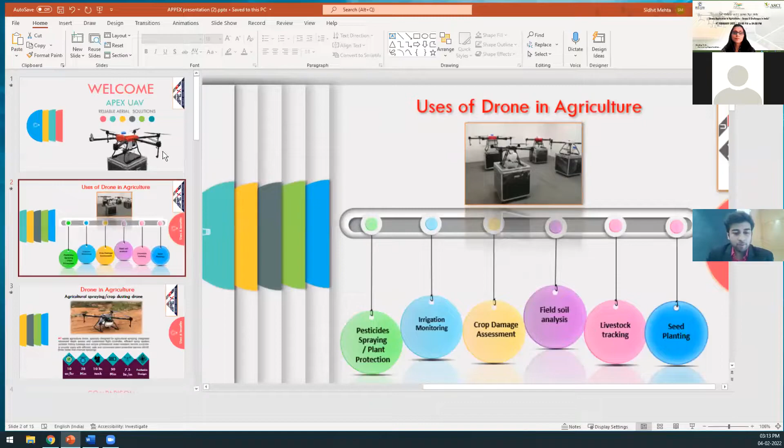Very small presentation. Thank you for the lovely introduction, Dr. Vandana. And yes, I do support Make in India, not just to make in India, but to make something cheaper or of better quality. That is the motto. With that clear, we shall start.

So, uses of drones in agriculture - I was hoping the doctor from TNAU would cover this so I don't have to, but I'll just briefly go over it again. Pesticide spraying in plant protection is the biggest use of drones as of now. It's established, not something new that we haven't seen. It has been well established outside of India since 2013.

Irrigation monitoring is also a part of similar drone use. We use an RGB camera and can easily map out that the water being used to irrigate the field is evenly laid out - it's not getting clogged or logged at point A or point B, and all the crops and roots receive an equal amount of water.

Crop damage assessment and field soil analysis is done by a fleet of multispectral drones. These drones analyze and receive the electromagnetic wavelengths reflected from the leaf and soil of a particular area. Every chemical or element has a different reflective index, so by analyzing them we can get the exact chemical breakdown for each individual chemical - maybe certain fields have more potassium and others more nitrogen. So with field soil analysis using multispectral drones, we know exactly what crop to plant. We can minimize fertilizers and have better soil growth without tarnishing the soil.

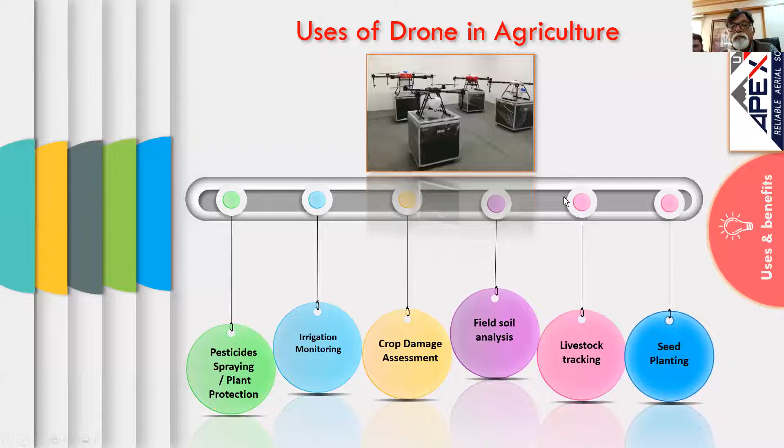Livestock tracking is starting to be seen more in hilly areas using drones. You must have seen in movies outside India, like Canada and Australia, where cattle have a green tag on their ear and a drone communicates with that tag. It's a batteryless tag with no electronics, it just reflects an RF frequency. By tracking that, the drone will know up to 100 meters where the cattle is, its exact location, temperature, and whether it's in distress.

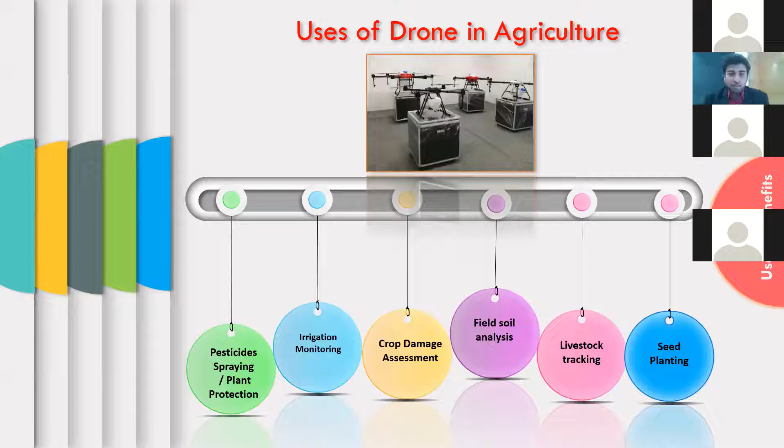Seed plantation is similar to spraying, where a drone flies with seed and sprays it across a field. This is mostly done in hilly areas, because on flat land most people prefer to plant seed manually.

Talking about industry standards, the way the industry is moving toward optimal solutions, a 10-liter drone is the most optimal. It can cover approximately 10 acres per hour, with a flight time of 28 minutes at full load, and the 10-liter capacity batteries can be recharged within 30 minutes. These are high capacity Korean batteries, which is why they support such fast charging, so we don't need to carry 10 or 20 different sets. With just 3 sets, we can have a continuous operational process.

7.5 liters per minute spray rate is also adjustable, but this is the maximum the drone is capable of. Generally, when spraying the field, we don't exceed 5.5 liters per minute.

Suitable design is... might mute the audio.

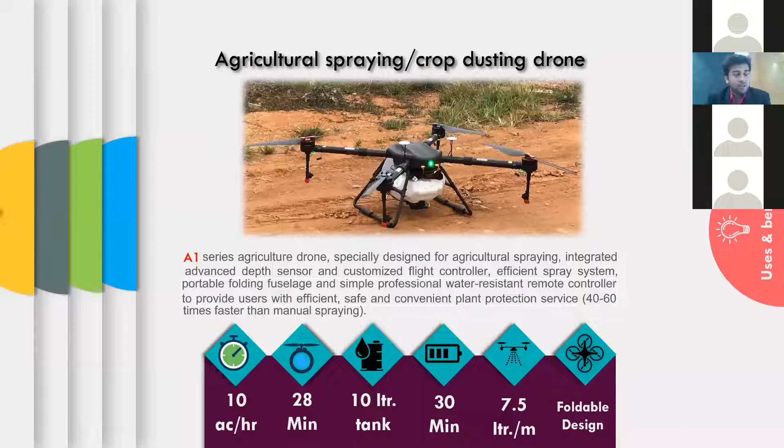The last point is foldable design, so that it doesn't get damaged during transportation or storage.

Taking a look at the comparison between traditional or conventional spraying versus precision spraying and farming: canopy coverage. With a drone, when the propeller is spinning, we have forced induction air going across the crop. Not only does it blow the dust off the canopy, but the spray also gets deeper canopy penetration compared to just spraying blindly with a tractor, which simply throws water mixed with medicine on the crop.

Dose management is something we can fine tune and control with a drone rather than blindly spraying with a tractor. We can set in the app exactly how much medicine we want per plant or per acre of the crop. Water saving with drones is significant too—we generally use 10 liters of water per acre, whereas in traditional ways we need anywhere from 200 to 500 liters, requiring us to dilute the medicine with much more water.

Treatment time is again very important. A manual sprayer needs about 6 or more hours to cover 1 acre properly, and a tractor can cover 1 to 2 acres per hour. A drone can cover much faster, flying at 45 kilometers per hour, covering a width of 3 meters, and can easily cover 1 acre in 3.5 minutes.

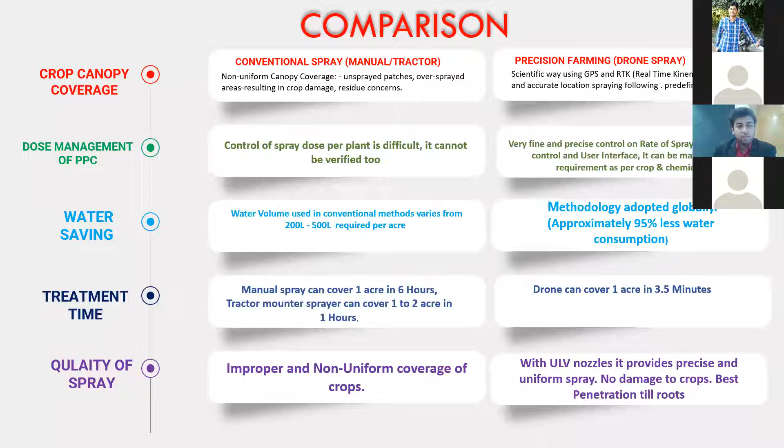Chemical utilization is also less, as less chemical is wasted in the air compared to spraying manually.

Safety is a big factor for me, because when I initially saw how spraying was being done here, a human would attach a backpack, generally 30 or 25 liters of basically poison mixed with water, on their back and spray for 6 hours a day, which causes a lot of health problems down the line. Not immediate death, but certainly the quality of life goes down. If someone sprays 6 hours a day, every day, they can develop lung problems like lung cancer or skin cancer within 5 years. Use of an aerial sprayer eliminates all of that.

Adaptability is again concerned with the type and the area of the field. It's difficult for farmers to work in wet farms like paddy, in step farmland, hilly areas and mountains. A drone with a terrain radar sensor and an obstacle avoidance sensor can easily cover all of that within the same time, maybe half a minute more or less.

Dependency on labor: when you see our farm is infested, you have very few days, probably less than 6 days, to go out and get labor, arrange people, arrange everything, and have them spray. With the use of aerial sprayers and drones, this is eliminated as it's a one-man operation, and more land can be covered quickly than any other way.

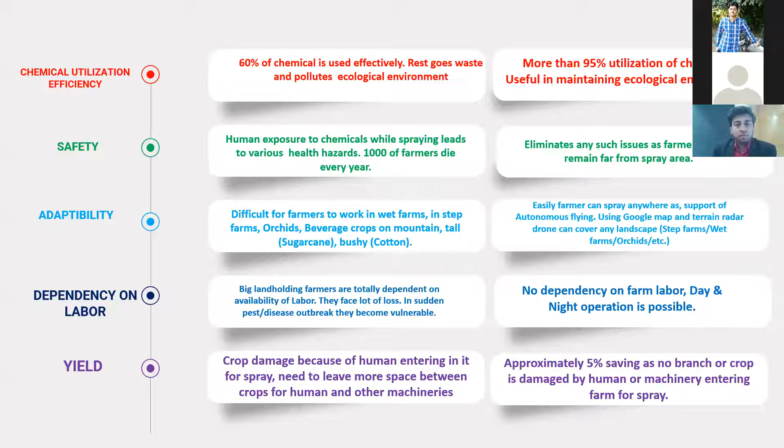Moving on to manufacturing and production, it may seem intimidating using or making or maintaining a drone at first sight, but it is not. Through the years, it has become really simple, and with a constant change in and advancement in technology, this will only get easier.

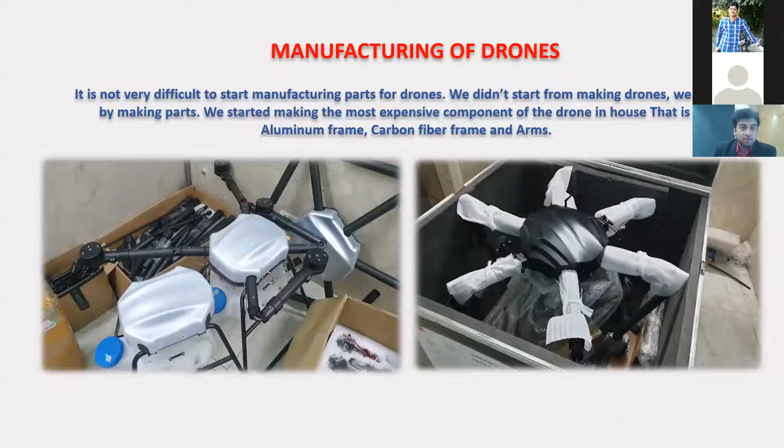How we started: by making parts, not drones. So we make the landing, we make the carbon fiber sheet. This is a vacuum mold in-house, so we have our own design. Then again, we use a lightweight, high-quality aluminum to make landing gear, landing strut, instead of using hydraulics and complicated parts.

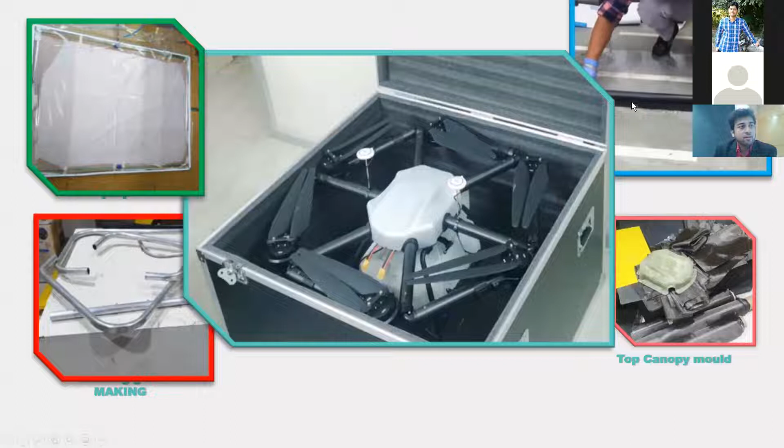The arm, the hands and the arms are made by rolling carbon fiber dipped in a proprietary resin over a titanium rod. Again, this is our canopy mold, our canopy design NCF. This is the most common one we will see.

Pilot salary, let's say helper also we could include, which is not needed, but this is a worst case example. Pilot license - yes, I know the good people at the Agriculture Skill Ministry are working to provide free licenses, at least for agriculture drones, to train people. But currently, the license costs 65,000 INR, and a few days ago DGCA announced 12 more drone institutes across India who are authorized to give licenses for operating drones up to 150 kilos.

We'll account for petrol as well, just in case, given a budget of 10,000 for petrol. Maintenance would be around 5% of the total cost. Insurance is currently less than that, but we have taken per year, it's 40,000. In total, it would come to just shy of 19 lakhs.

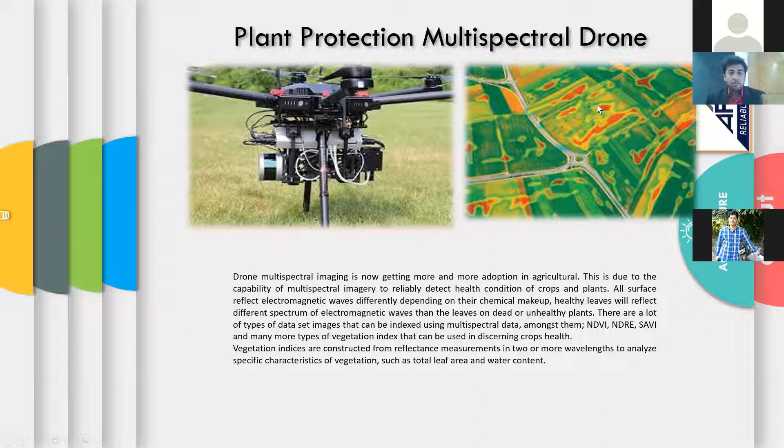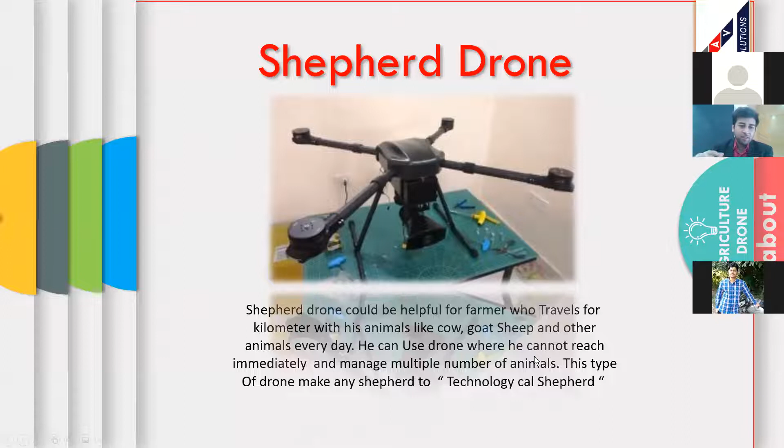There is a new type of drone also, which is not being used as much currently because the technology is not matured enough. These are called shepherd drones. I want to mention it because in a couple of years we may see these also in the market. Shepherd drones are used to herd sheep and cattle from farm to farm or for grazing. So if you have more cattle, like 4,000 or 5,000 animals, and you want them to move from a certain area to a certain area, these type of drones have a high-pitched ultrasonic sensor emitter, which emits a very high-pitched noise, inaudible by humans but very tedious to animals. It won't hurt them, but it annoys them, so they move in the opposite direction. Using this, we can guide and shepherd goats, sheep, cattle, cows, any kind of farm animal. Even chickens will respond to this, so they can be kept in an area and easily managed by one person.

So now all is well and good till now, so we must have some challenges. The first challenge is uniform distribution and spraying, that is its effective application.

Now we need the pesticide board to sign off on this. As of now, they have signed off on all organic use in the field by drone, but they are still collecting data and doing a good job at that. We would need to wait about 6 to 8 months more so that the pesticide boards can sign off on the use of chemical fertilizers with drones in a particular field, given the crop quality, the soil, the landscape, etc.

Instability in government politics and policies regarding drones is another issue. We get a lot of calls here, and farmers ask that now the government has made the drone legal and they can use it, but previously it was banned. How do we know that in future it won't be banned again? What if it's banned? If I invest so much, 6.5 lakhs in a drone, how would I know that my investment is safe? I'm not talking about what the government policy should be, that I leave to the respected officers in charge of such things. But my request is that once it is finalized, it should be fixed. It shouldn't be changed every 1 to 2 years, as that would just leave a loss of confidence among people.

Technical knowledge of farmers needs to be improved. I know many KVK centers and universities are working day and night, including some private companies also, to inform the farmer. The biggest challenge we have is that most farmers refuse to believe that if I spray 10 liters instead of 200, I won't get infestation. So we need to acknowledge that and teach the farmers that 200 liters is not the solution. The future moving forward is 10 liters or less per acre.

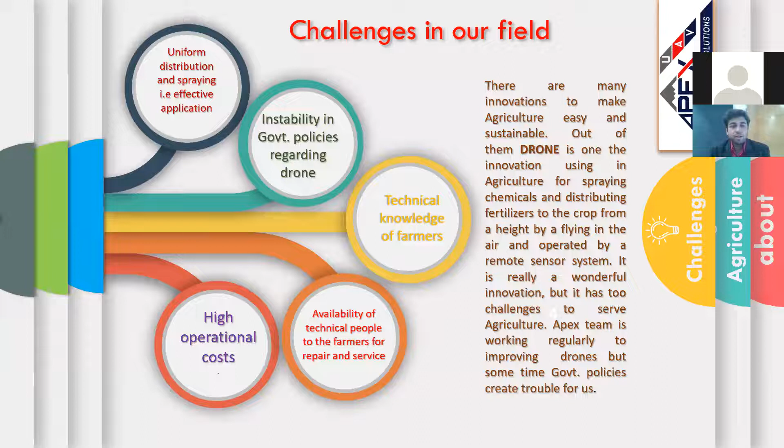Coming to government support, as I mentioned, the problem was in policies, but as we have seen now, we are in touch with DGCA and DGFT, and they are creating guidelines which will be here for at least the coming 10 years. Hopefully that would increase investor and farmer confidence.

The Pesticide Board is currently working already since last 2 years. I know, including TNAU University, that they are working on testing different medicine from different companies on different fields, matching with their climate, matching the soil quality and the previous nutrients used in that particular soil.

Subsidy - there have been recently talks of subsidy up to 50% on drones, specifically on agriculture drones. So I believe in a couple of months we'll have a clear understanding of how much the government is willing to subsidize this technology. And the last is, this is something we need to change - the farmer understanding and use of the drone and their mindset.

A lot of universities, and KVK, Krishi Vigyan Kendra, are working on this, and with time this will also be improved. Yes, that's all. Thank you.

Thank you, Mr. Siddhi, for the wonderful presentation. So clearly you have indicated not only how the drone could be manufactured - it's not such a difficult thing - but specifically, because it is always a pain point for everyone, whether he wants to get employed or wants to become an entrepreneur, he wants to see the cost factor of that particular thing and the commercialization, which you have covered very well. And definitely what you have said, that we need to motivate and convince our farming community to adopt this technology in a cost-effective manner. So thank you very much for these points.

Thank you, ma'am. So sorry for the inconvenience caused. So I will continue my presentation. Is it visible? Yes, it is visible. Okay. Are the slides moving? Yes, they are moving. Yes, sir.

As I have already explained, the Tamil Nadu Agriculture University is working on different geospatial technologies for soil monitoring, disaster and land degradation mapping. Now we have expertise in crop area mapping and yield estimation, and Tamil Nadu is the first state to introduce remote sensing based crop insurance as an operational service. With this technology, every year we are helping a minimum of 5 lakh farmers.

Now we are putting geospatial technologies into water resource monitoring. For the past 5 years we have been working on drones. Drones can be used for mapping and for smart delivery of agriculture inputs. So I will restrict my presentation to drone applications, with our own experience in different applications.

There are different types of drones - one for mapping, another for application of inputs. For mapping, we can have two types of drones: one is the quadcopter, that is helicopter type, and another one is fixed wing.

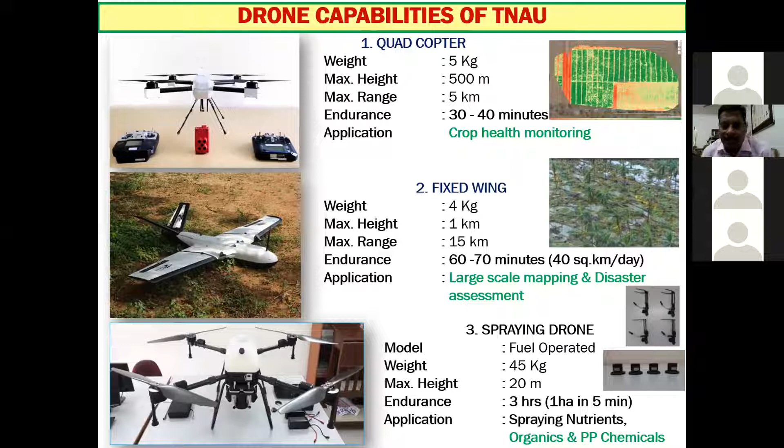The third one is the spraying drone. There are two types, fuel operated and battery operated. The fuel operated is the advanced one, with a takeoff weight of 45 kg. This type of drone can fly up to 20-meter height, with an endurance of 3 hours. We mainly use it for spraying nutrients, organics, and plant protection chemicals.

As you all know, we have different types of sensors for mapping, such as multispectral and hyperspectral sensors. Multispectral sensors are widely used with drones, having 3 to 6 bands, and the vegetation indices derived from them are widely used for assessing stress, whether pest, disease, or nutrient stress, and where to apply nutrients. This variable rate applicator can be linked to these images.

There are different companies working on providing multispectral sensors. The major ones are Parrot, MicaSense, and Sentera.

Hyperspectral sensors have the potential to assess different monitoring capacities, mainly different types of pest and disease very sharply. TNAU is working on identifying effective wavebands to discriminate or map the influence of pest or disease, whether the symptoms are visible or not. Many hyperspectral sensors are available, like Corning, then Headwall, now taking off quite well, and Mjolnir.

These are different hyperspectral sensors. Already the field ASD Spectra, ASD Field Spec Pro, is available at the field level. Many hyperspectral sensors are coming up for use with drones, which can be used for mapping crop stress or crop fields, discriminating crops, identifying stress, and effective application of inputs.

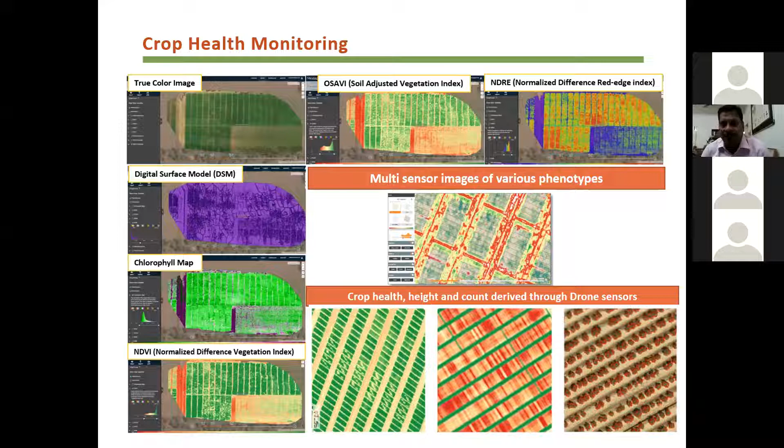A lot of applications are going on in selecting phenotypes. We can also assess crop health, height, and plant count, everything through drone sensors. For assessing crop health, we have come out with many vegetation indices, which can be effectively used for crop monitoring as well as stress detection.

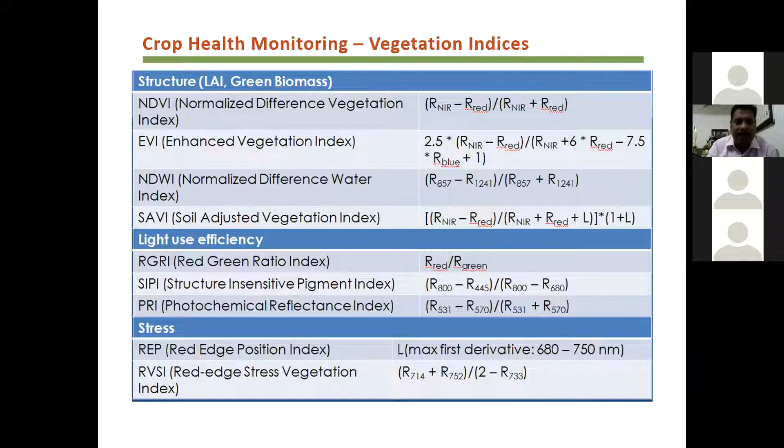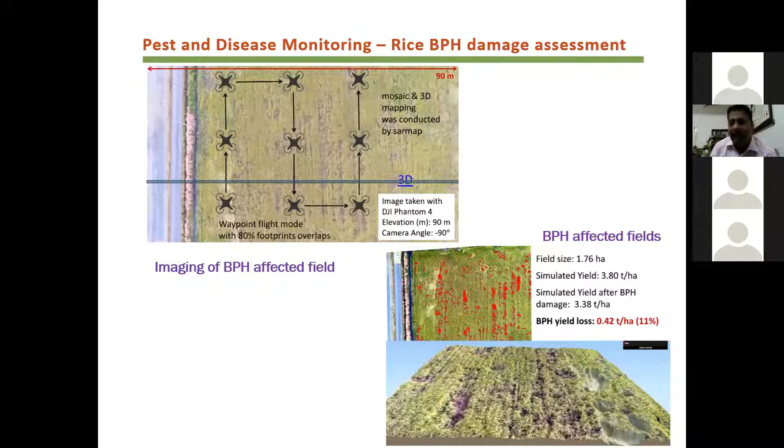One case is pest and disease monitoring - rice BPH damage assessment, where the physical damage can easily be estimated with 3D geo information from drones. In this case, BPH yield loss was assessed to be 11%, and we can exactly mark the area. We can go for precise application, through which we can reduce the quantity of pesticide dumped, as well as avoid environmental hazards through pesticides.

These are the different types: fixed wing, quadcopter. Fixed wing drones are highly useful in large area mapping, and we can operate it by hand throw. For image capturing, we go for more than 70% overlapping, which is very useful for 3D mapping. The second one is the spraying drone.

This is a fuel operated one, and it can cover 1 acre of area in 2 to 5 minutes, depending upon the spray volume. For example, nutrients need more spray volume, whereas low dose, high efficient pesticides and fungicides need only lesser quantities. We are conducting research on standardizing these things.

Here you see the herbicide applied plot - this is a non-selective herbicide. You can see the uniformity, which can be greatly achieved through drones, with more than 95% accuracy achieved with the help of uniformity in spraying. Here we have used an atomizer nozzle with a droplet size of less than 130 microns.

So one application is controlling weeds by using drones for spraying herbicide. Another one is fall armyworm, an invasive pest which has caused a lot of damage to maize. We have standardized and come out with a drone spraying protocol especially for this, and we have demonstrated it at farmers' fields also.

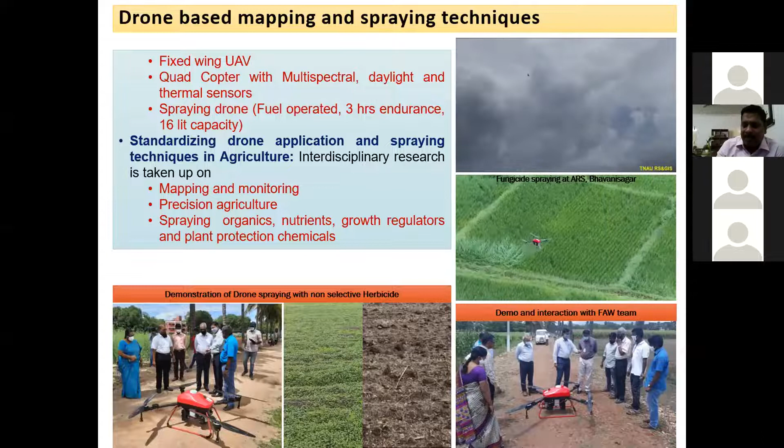When going for this type of standardizing spraying, you should come out with different features - that is spray dynamics as well as spray volume. One is spray fluid: with fuel operated drones we can restrict it to up to 30 liters per acre, that is 75 liters per hectare. We have also standardized the speed.

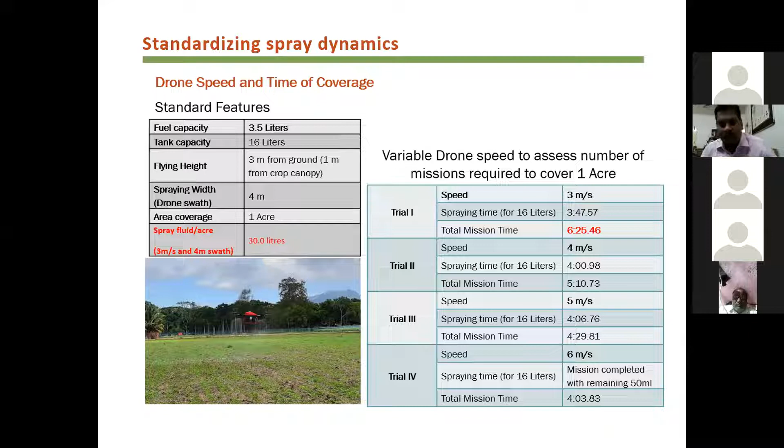The delivery also we have standardized. Within 1 or 2 months, we will be coming out with standard operating protocols for spraying these things. We have also studied the spray dynamics and droplet size, and found that in case of the atomizer, more than 80% of the droplets are within 70 microns, which is advantageous as we can achieve more efficiency and uniformity.

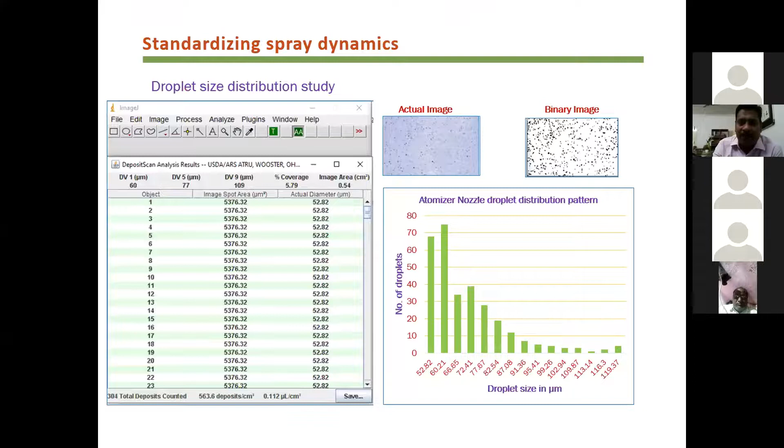These are different applications - one is fall armyworm control with emamectin benzoate. We have standardized 80 grams per acre with 30 liters of spray fluid to control the fall armyworm, with a second round of spray to take care of the insect. We have not only standardized individual sprays of pesticide and fungicide, we have now come out with a comprehensive protocol.

For example, rice has 4 sprays: one is pre-emergence application of herbicide on the 3rd day after planting, then pesticide spray to take care of sucking pests at 25 days, then to take care of leaf folders and stem borer at 45 to 50 days, then the 4th one, nutrient spray, and fungicide in case grain discoloration is anticipated.

So this is how TNAU is coming out with a comprehensive spraying protocol for each and every crop. Rice has 4 sprays. Rice, maize, groundnut, sugarcane, and cotton are the 5 crops we took in the first step, and now we are moving to horticulture crops also. For tomato, we have targeted fungicide spraying as well as Panchagavya.

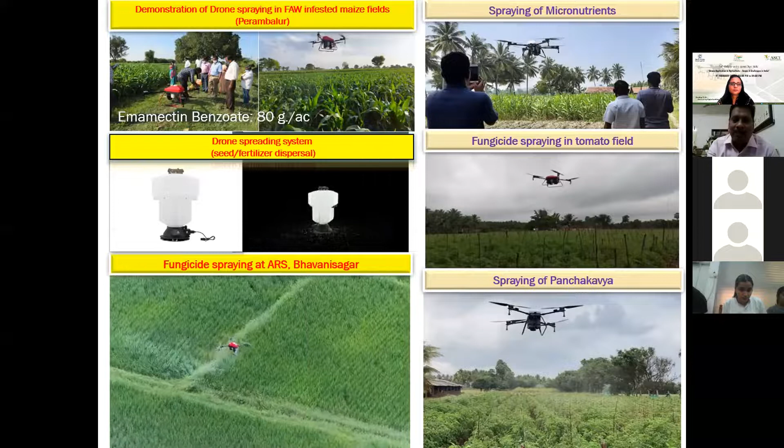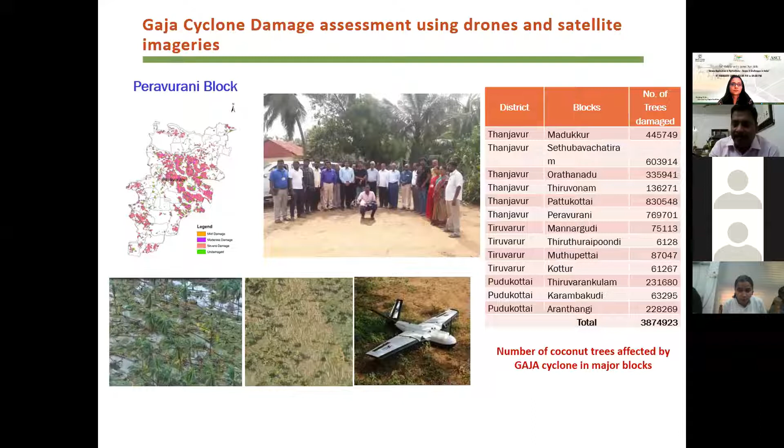This is the cyclone damage assessment, which we have done with copter type as well as fixed wing drones. We have exactly assessed the number of trees, 38 lakh trees were uprooted or damaged. This is the flood inundated fields and the lodging effect of floods on crops. Precisely, we can assess the damage which is passed on to the insurance for claim settlement.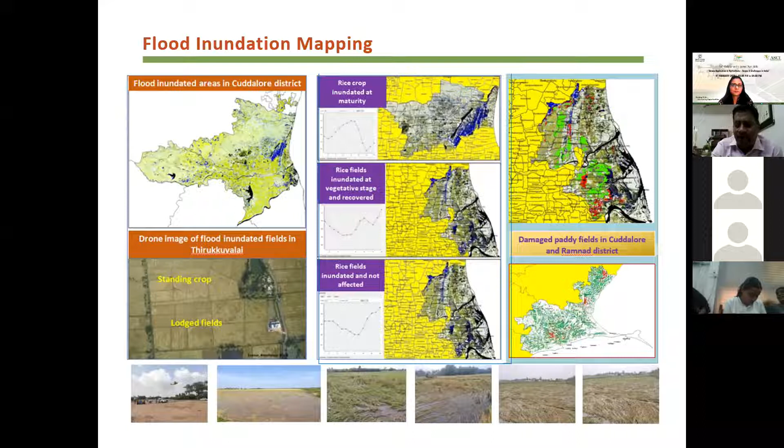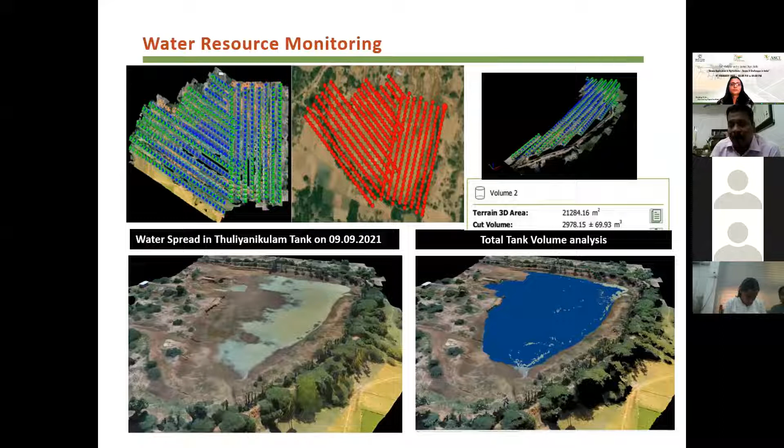This is water resource monitoring. Tank irrigation is a major source of irrigation, but information on tanks is not available. So we have come out with a methodology, and now we are coming out with 3D geo information and water storage information for around 16,000 tanks, which has a capacity of 93 TMC. For effective water resource monitoring, drones are one of the best tools.

For plantations, spraying with drones will definitely serve the purpose, because farmers are physically facing challenges, and it can also be applied for animal repellent. In case of inaccessible areas, even we can spray with drones. So these are the applications.

In agriculture, a lot of applications are there, each and every field has its own. Even now we are going for drone-based dusting of pollen. So many applications the agricultural universities are coping up with and coming out with standard operating protocols.

From the government side also, we are getting a lot of support. The Ministry of Agriculture has come out with a notification, and in future government institutes will get 100% or a 10 lakh grant for the purchase of drones. For FPOs, it is 75%, and even custom hiring centers can get subsidized cost of the drones. So financial aids and grants are going to come on a large scale, and the cost of drones is also coming down.

With this information, definitely farmers can go for large scale use of these drones. On the industry side and the research sector also, there's a lot of scope to fine tune things and go for large scale application, as explained by the previous speaker, on a business mode. So finally, to cope up with these applications, what is the skill available with us? What is the manpower available with us?